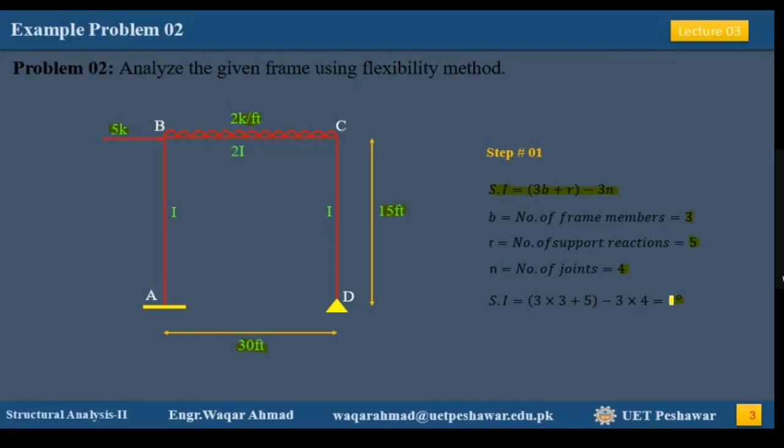Now, what we do in step number 2 is that we select the redundants and release them to obtain the basic determinate structure. The 2 redundants can be selected from support A or support D. I have selected them at support D, so I will release the reactions at this point.

When I release this support, I will then show my redundant actions. This is my first redundant action pointing upward, and this is my second redundant action pointing in the rightward direction horizontally. Now, what are the values of this AR1 and AR2?

Both are unknown, and we will be using the flexibility method to find the values of AR1 and AR2. Once these values are known, the whole structure can then be analyzed using the available equilibrium equations, because these are the only 2 unknowns which cannot be solved using the available equilibrium equations. So this is the redundant action matrix.

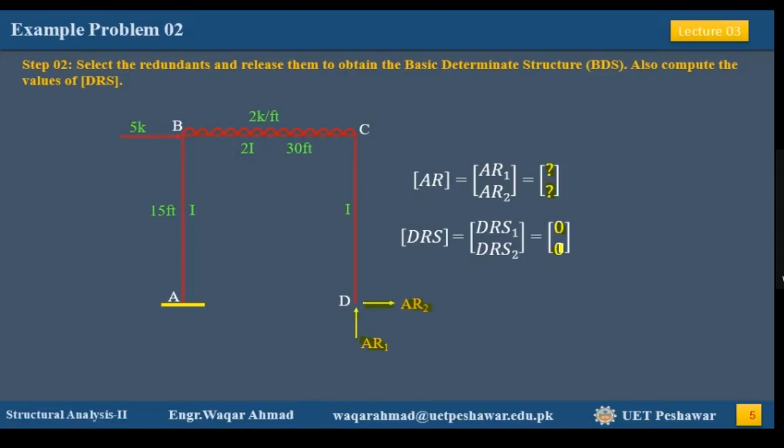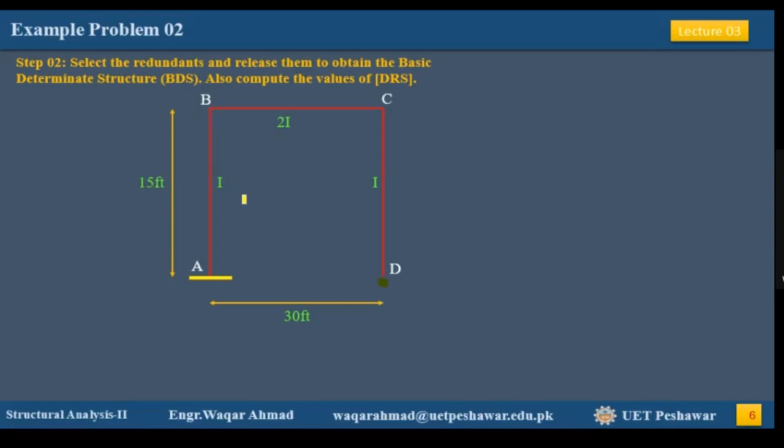So now we will obtain our basic determinate structure by removing the applied external loads and also by releasing the joint at point D. So this is now our basic determinate structure, BDS, which we will be analyzing now in step number 3. In step number 3, we will be analyzing the BDS when acted upon by the external loads. This is the first sub-part of step 3.

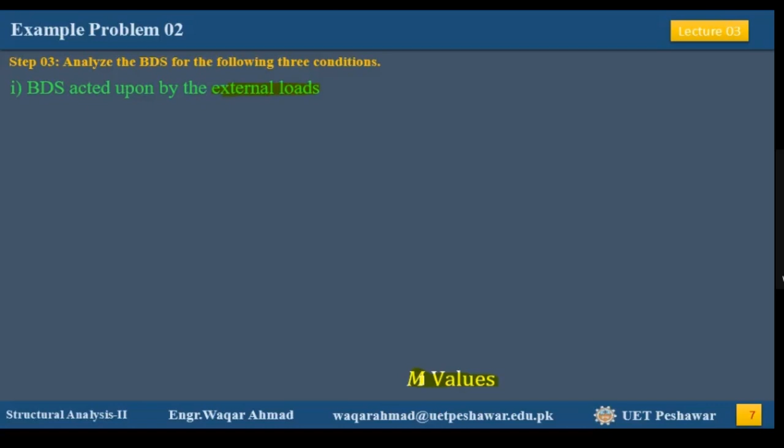And from this step we will obtain the capital M values. Now we know what the capital M values are: the capital M values correspond to the bending moment equations for each member due to the externally applied load.

So now let's start with member number 3. If you look at this member, we don't have any external load applied on it, so the axial force, the shear force, and the bending moment at point C as well as at point D will be 0 because there is no external load acting on this member. Now, if you write the bending moment equation for this section A, for this cross section, there is no load acting and no force which causes moment about this section, so the moment equation will be 0.

Now in the same way, if you look at the next member, we have an external load applied here: this is the 2 kip per foot uniformly distributed load. This load will cause shear as well as moment, and both the shear and moment will be resisted at B, because now we are carrying our analysis towards this point, and if we take the resistance on this one, that resistance will be transferred over here, and then we know that there is no support.

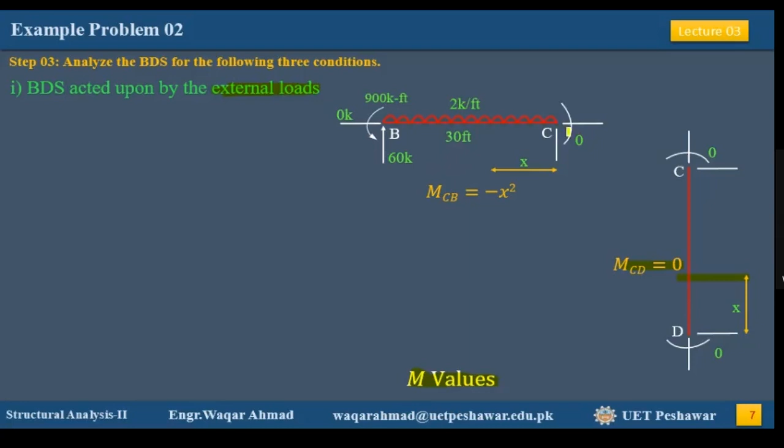Resistances cannot be supported by this joint C. That's why we don't want this joint to resist shear, moment, or axial force. So all the shear and bending moment will be supported at this joint B. Now, similarly, for this member...

Now these moments, shears, and axial forces will be transferred to this member. So the shear force now will be acting as an axial force for this member. And if we solve out, using the equilibrium equations we discussed in detail in problem number 1, we come out with these values of axial force, shear force, and bending moment at this joint A.

Okay, so now if we go back to the bending moment equations, the bending moment equation for this member is equal to 0. For this member, it is equal to negative x squared. This is exactly the same as problem number 1 we solved, right?

So we have taken a section at this distance x from C, the origin. And at this section we want to find the moment equation. The moment will be coming from this 2 kip per foot uniformly distributed load. So if you multiply this 2 kip per foot with x, and then again multiply by x over 2, this will give you negative x squared. The negative sign is because of our sign convention we already discussed.

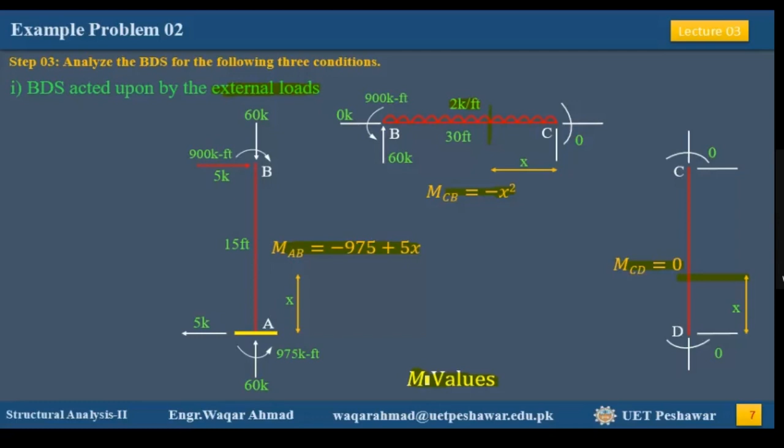Now in the second substep of number 3, we are looking for the M1 values, small m1 values. Where will they come from? They will come from the BDS when acted upon by a unit load, and that unit load should be acting corresponding to redundant location number 1. So what was redundant location number 1? It was this upward unknown reaction.

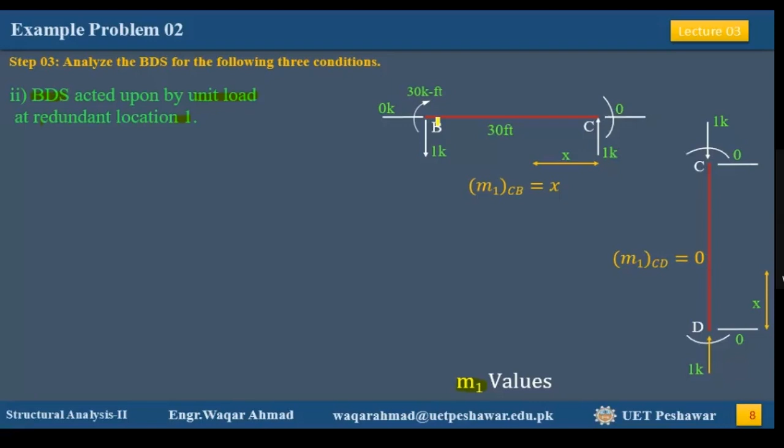So now if you apply a 1 kip load here, this load will be resisted at this point, and accordingly transferred at this point, and then resisted here, and it will also cause a moment which will be resisted at B. Similarly, this 1 kip and this 30 kip-foot moment will be transferred to this member, and finally resisted at this joint A.

Now if you look here, there is no other force which causes moment. The only moment we have here is the one which we transferred from this member CB. So these are the bending moment equations: this one is for this member, this one is for this member, and this is for this member.

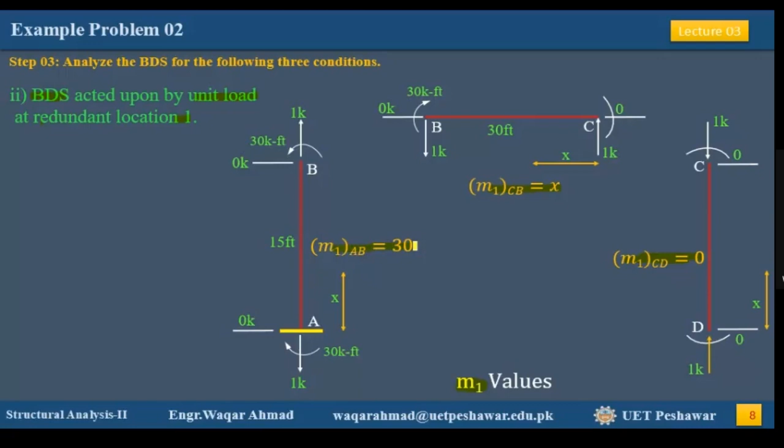So now, if you look at the next step, we will have to analyze this BDS for a unit load which acts corresponding to redundant location number 2. So what was our redundant location number 2? It was this horizontally unknown force.

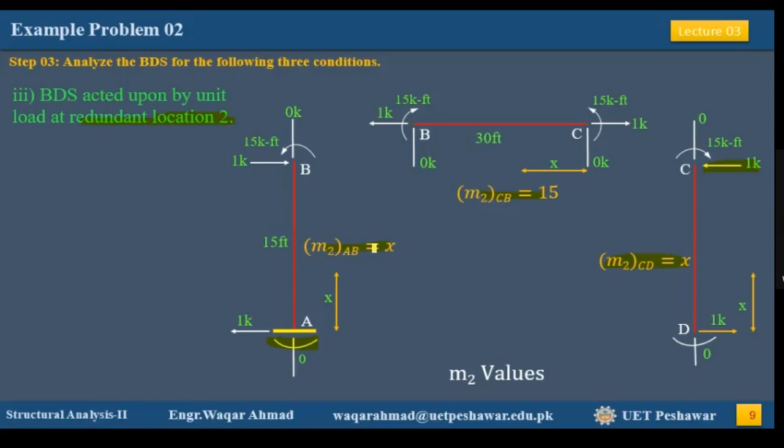Okay, so if you look at the bending moment equations, this is for this member and this is for this member. Now we know how these bending moment equations are obtained — we discussed them in detail in problem number 1. So now, in the next step, we have to arrange all these bending moment equations in the form of a table.

Now why do we do this? We do this because we want our work to be efficient. By efficient, we mean there should be less chance of error, and we should go with our work a little faster, okay.

So this is the origin for AB. These values correspond to member AB, these correspond to member BC, and these correspond to member CD. So the origin, we know these are the points taken for writing the bending moment equations, and these are the limits from 0 to the length of the member. Moment of inertia: for the first member it is I, for the second member it is 2 times I, and for the third member it is I.

Now these are the equations we obtained from step 3A or 3.1, when external load was applied. So this was the bending moment equation for member number 1, this was for member number 2, and this was for member number 3. Similarly, the M1 values and M2 values are given here, and they are coming from step 3B and 3C respectively.

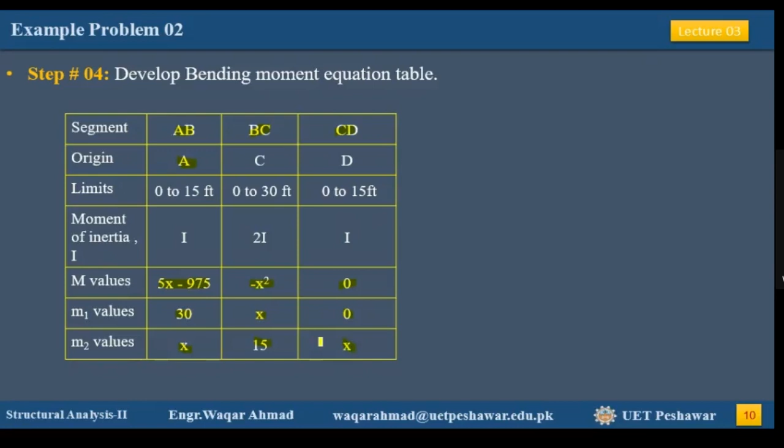Okay, now we will be utilizing these values in the next step for finding the DRL matrix. The DRL matrix corresponds to the displacement at a redundant location due to external load acting on the BDS, the basic determinate structure, okay?

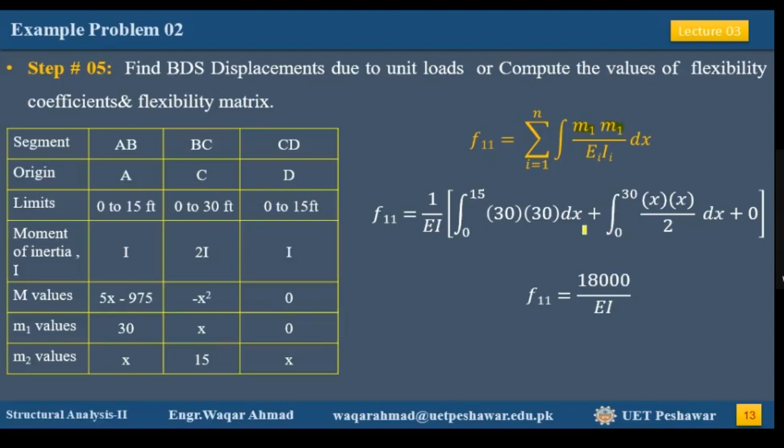This is the equation. So we will be using both times the small m1 from this table, and then we sum them to get this value. Similarly, we obtain our F22, and then we can also calculate F12, which will be the same as F21.

So again, F12 here corresponds to finding the displacement at redundant location 1, with the unit load applied at redundant location number 2. So we will now use both M1 and M2. If you solve this, you obtain this value for F12 and F21.

Why are F12 and F21 the same? Because whether you write M1 first or M2 first, it does not affect the final output, right? The final output will be the same as given here, 6750 divided by EI. So now this is the flexibility coefficient matrix.

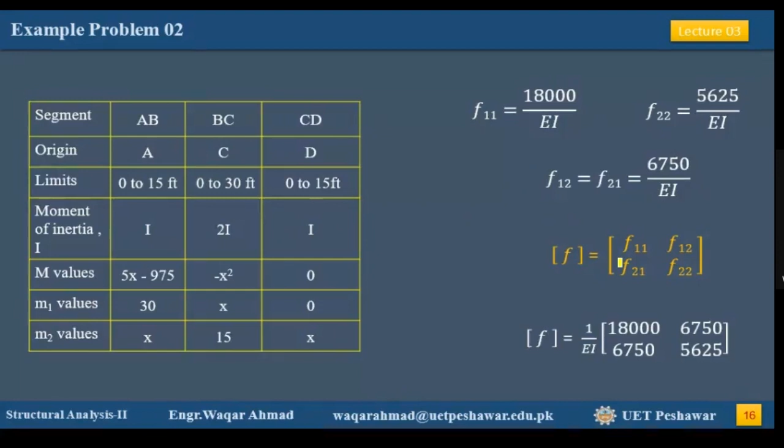So this was about finding the values of the redundant actions. I told you earlier that once the values of the redundant actions are known, we can solve the remaining structure using the equilibrium equations. But if you are using this flexibility method, there is a proper mechanism for this, and you have to use it.

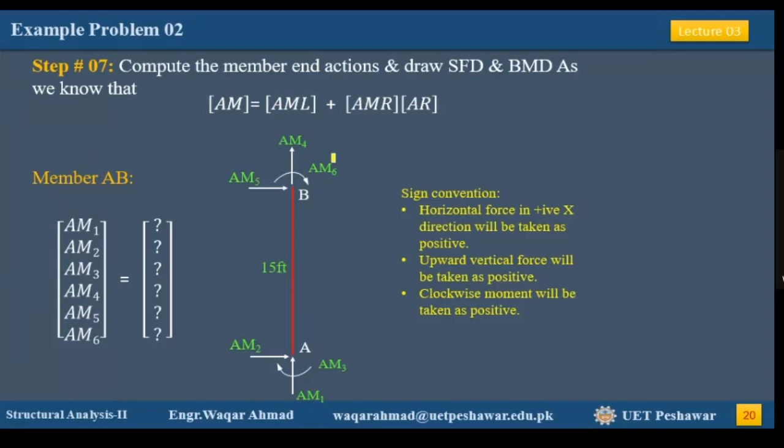Now we can apply this equation in order to find the member end actions for each member. What is this AM matrix? This AM matrix is the member end actions. This AM1 acting upward, this is our AM1, we have chosen this to be our AM1 for this member. This shear is AM2, this moment is AM3, and similarly AM4, AM5, and AM6. So now we need to apply this equation for this member in order to find out these values of AM1 to AM6, and what are the different matrices involved.

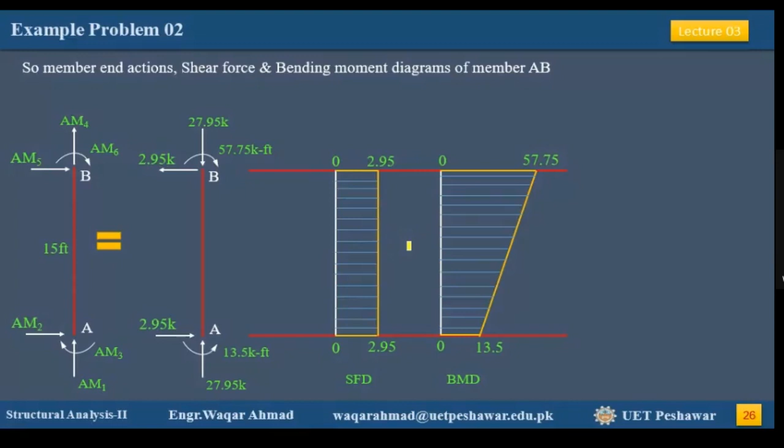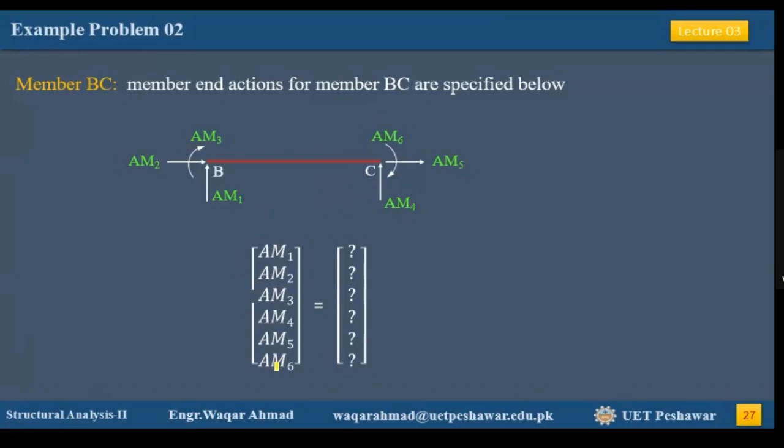Similarly, for the next member, we need to find the values of the AM matrix, obtained by writing the AML matrix first, which corresponds to the member end actions when external load was applied on our structure. Similarly, we write our AMR matrix. The first column comes from step number 3, part A, when we applied a unit load and analyzed the whole structure for that unit load corresponding to redundant location number 1. This column comes from step number 3, part B, when we applied a unit load corresponding to redundant location number 2, and solved the whole structure for that load. So we got these member end actions, and if we write them here, we get this AMR matrix.

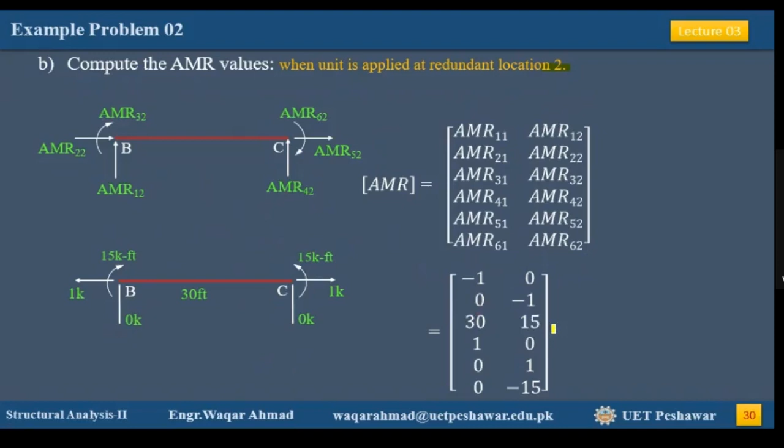Similarly, if we plug those matrices into the equation, we get our values of the AM matrix. This is AM1 for the second member, this is AM2 for the second member, similarly 3, 4, 5, and 6. Again, the negative sign simply shows that we need to reverse the direction of our member end action. Now the shear force and bending moment diagram here for the next member.

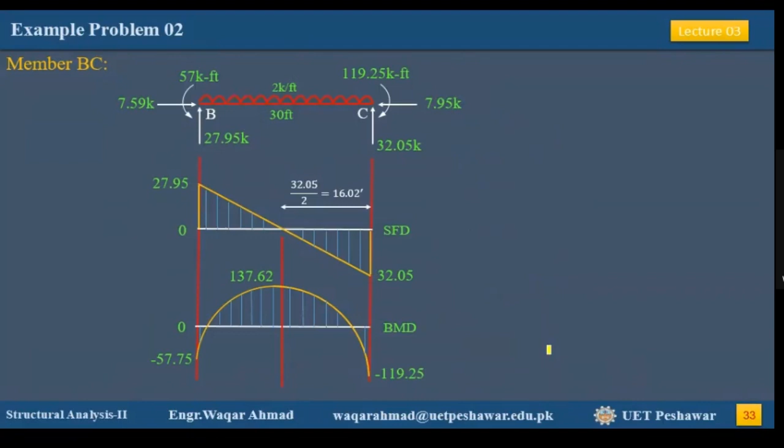Now we come to member number 3, and in the same way we find the AML matrix, the AMR matrix. After finding the AMR matrix, we need to plug those values of AML matrix, AMR matrix, and AR matrix here, so that we can obtain the values of our AM1 to AM6 for member number 3. So these are the values of the member end actions for member number 3. So again, we draw the shear force and bending moment diagram now for member number 3.

So the combined shear force and bending moment diagram for the whole structure now, you can see it. This is member number 1, this is member number 2, this is member number 3, and in the same way this is the bending moment diagram for each member. So this was about the example problem number 2. We did it a little faster because we already solved it in great detail in problem number 1.

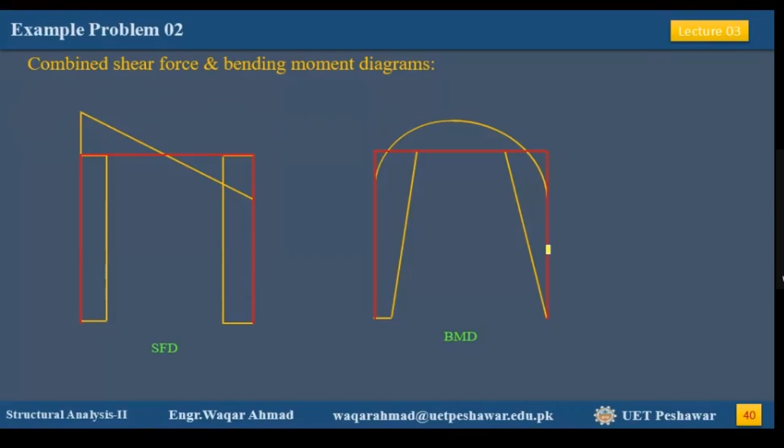Now let's move to another problem, and this time we will be taking exactly the same problem number 2, but now we will be making some changes. What are those changes? We are now applying some translation at this joint D.

So joint D is translating by 0.5 inches. You can see this joint is translating by 0.5 inches in this direction. Also, it settles down by an amount of 0.75 inches. You can see that this support is also settling by 0.75 inches, as given here. Now how do we solve this structure? This is exactly problem number 2 as we discussed, but now we have to incorporate this settlement and this translation into our calculations. Let's see how we do this.

Step number 1 is exactly the same. We have to find the static indeterminacy, and it comes out to be 2 degrees. This settlement, it will not affect the static indeterminacy for sure. Now we are also given the value of the modulus of elasticity and the moment of inertia for this structure. If we multiply them, we come up with this value. So whenever we use the EI value, we now have to put the value of EI equal to 125,000 kip-feet squared.

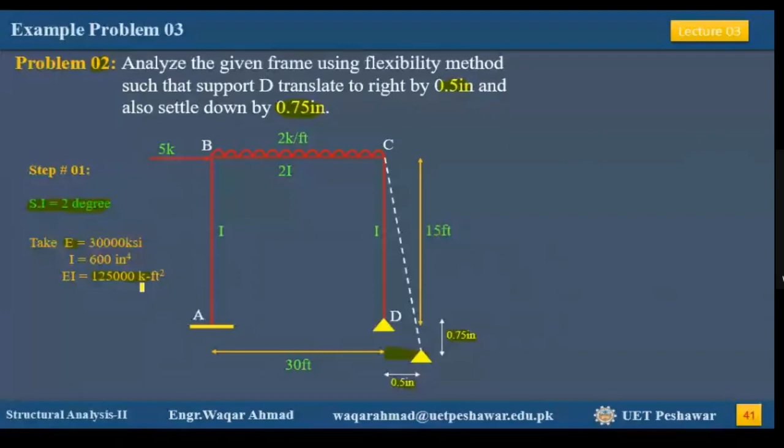Step number 2, we release our joint, our support at joint D, and we write our redundant actions corresponding to the constraints we have released. This is AR1, this is AR2, and of course we have to find the values of AR1 and AR2 through this flexibility method.

Now important to look at here is what are the values of DRS1 and DRS2. DRS1 corresponds to redundant action number 1. We have chosen our redundant action to be acting upward, and there is a support settlement corresponding to this redundant action, but that settlement is downward. This support is coming downward. It corresponds to this redundant action, but has an opposite direction. So corresponding to AR1, we will write our DRS1 value, but we will put a negative sign with this.

Now if we had chosen our AR1 value to be acting downward, then there would have been no need of writing this negative sign, because the settlement would have been in the same direction as our chosen direction for redundant action number 1. So in this actual case, as we have chosen our redundant action to be acting upward, but the settlement is opposite to this and is downward, we need to write the negative sign with this value of settlement.

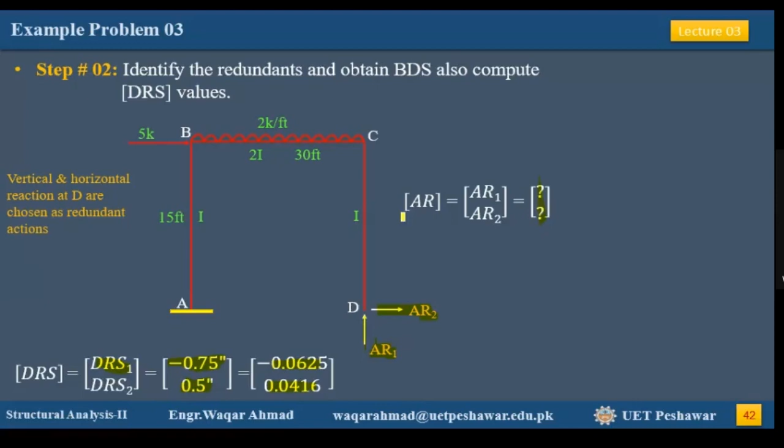Now we have converted it into feet because we are using feet as the unit for length most of the time in this problem, so we need to convert this to feet for unit consistency. So from this step we have obtained our DRS matrix. Now we need to apply the other step.

In step number 3, we have to again analyze the structure for the external load applied. So we have analyzed here, and the procedure is exactly the same as we discussed in problems 1 and 2. These are the member end actions we have obtained, and these are the bending moment equations for members 1, 2, and 3.

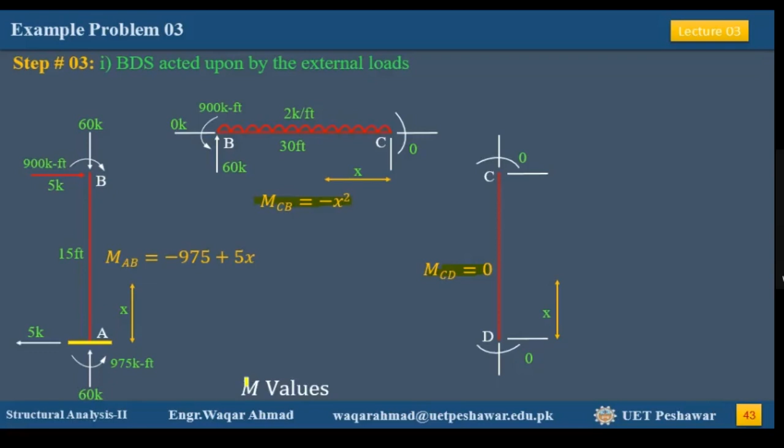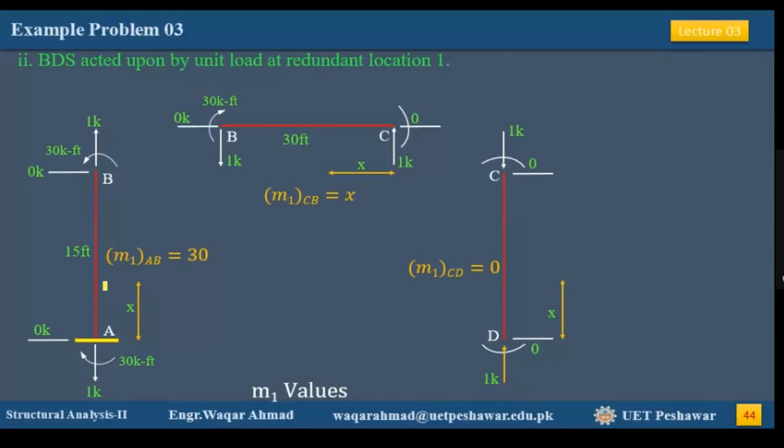So these bending moment equation values will be the M values, capital M values. Similarly, we write the m1 values corresponding to location number 1. We have applied a unit load of 1 kip and solved all these members. Similarly, in the next step, we have applied a unit load corresponding to location number 2 and again solved the members, and we have also written these bending moment equations for each member.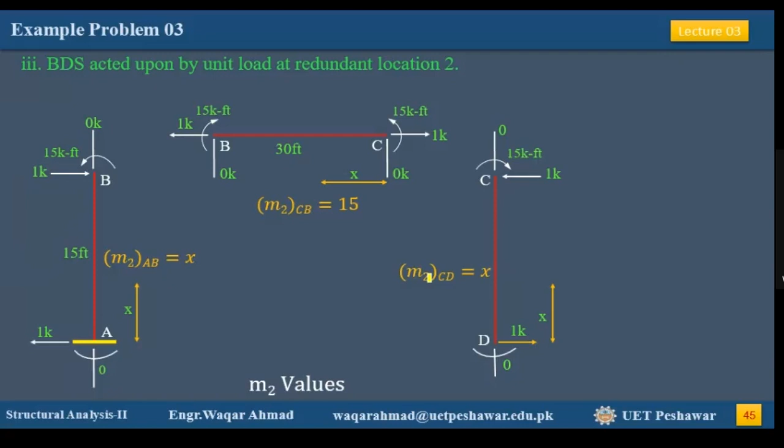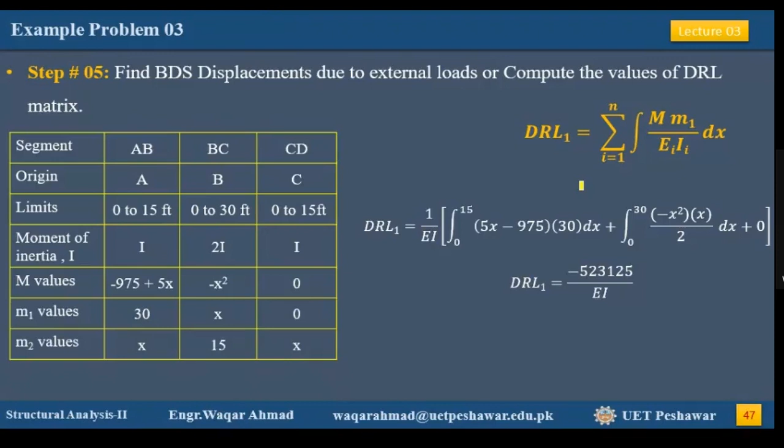Step number 4, again we now develop this table, and in step number 5 we need to find the DRL1 value, which will be the displacement at redundant location number 1 due to external load applied. So these capital M and small m1 values are now being picked from this table for members 1, 2, and 3. Also for members 1, 2, and 3, these are the small m1 values.

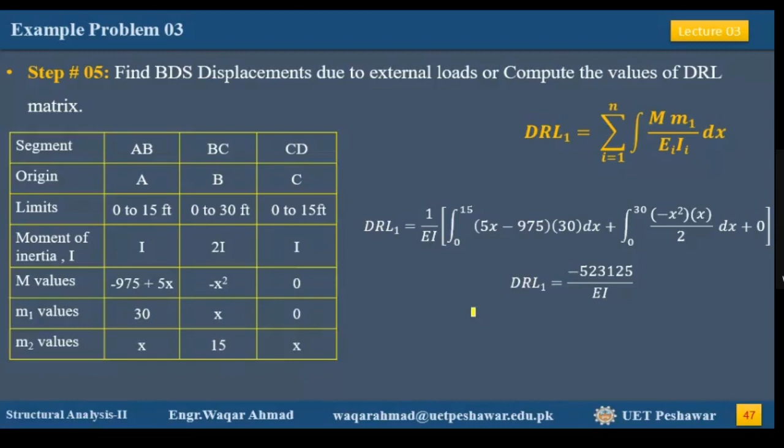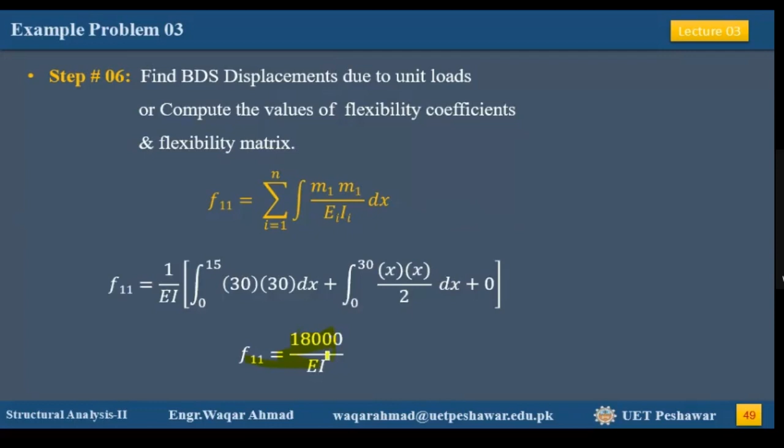Now similarly we find out this flexibility coefficient matrix, which is the displacement at a redundant location due to a unit load applied at any of the redundant locations. So this is F11, which is the displacement at 1 due to unit load applied at 1. We find this value exactly as we did earlier. So we can find F11, F22, and also F12 here.

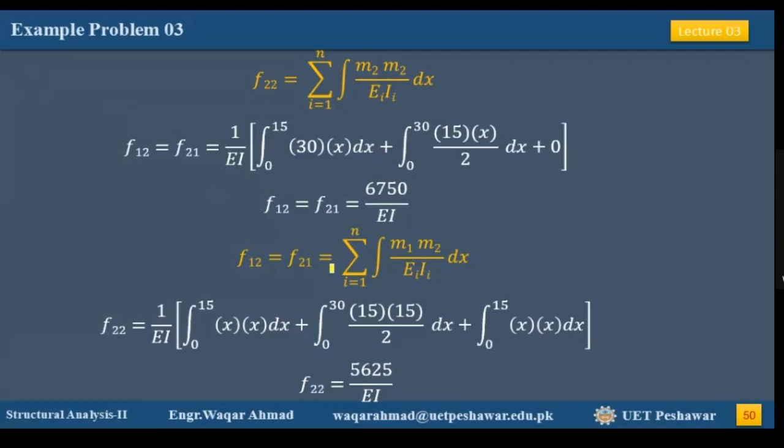So if we find out this final flexibility coefficient matrix, we need to incorporate these values of EI. If you divide each element of this matrix by EI, you come up with this value for your first element, and similarly these values for the other elements of the matrix. Now this is your final flexibility coefficient matrix.

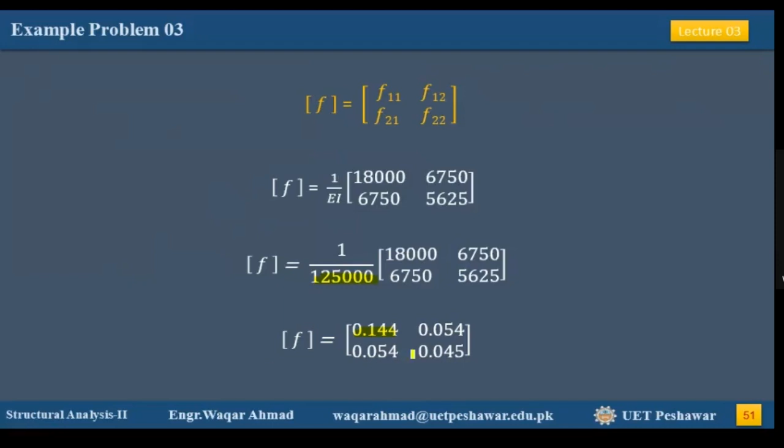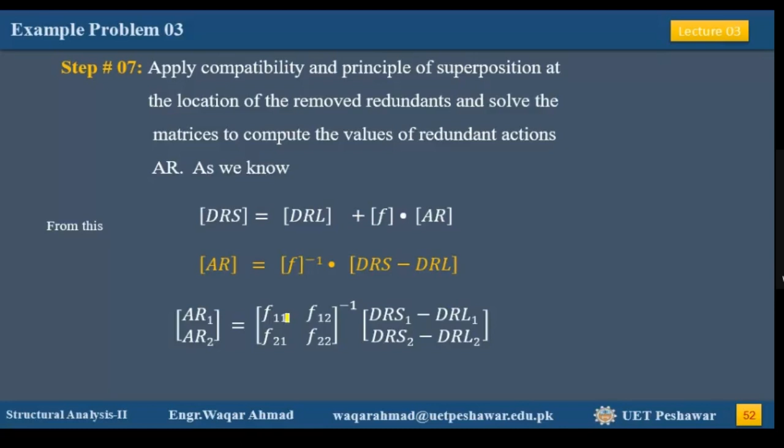Now we need to plug in these matrices in this equation. We have our flexibility matrix, our DRS1 and DRS2 values, and our DRL1, DRL2 values. So now if you plug them in, you have to take care of the sign. We have a negative sign with this, and also a negative sign in the equation. So you need to take care of every sign here.

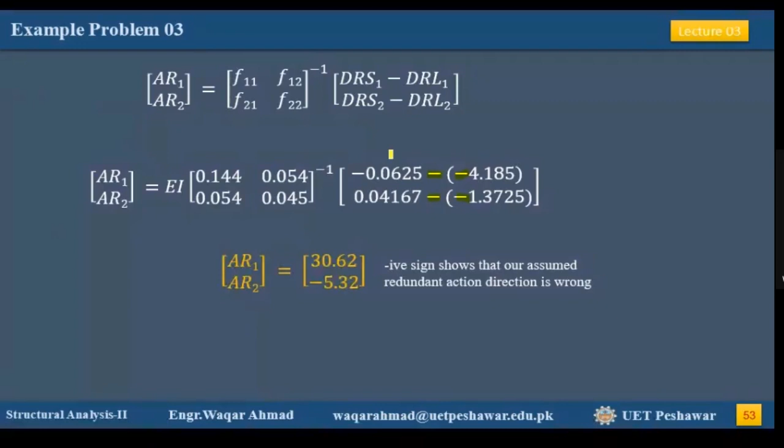So now DRS1, we know it is coming from that step where we calculated the support settlement and that translation, and we wrote that corresponding to this redundant location 1 and 2. So this is the DRS matrix, and this is the DRL matrix.

When you apply these matrices, this inverse, and then multiply them, you get AR1 equal to 30.62 and AR2 equal to negative 5.32. This EI will not cancel out because we have consumed the value of EI in this DRL matrix, also in the flexibility matrix.

I think this EI should be cancelled. There is no need now to write this EI because it is already consumed. This was by mistake, I will remove this now.

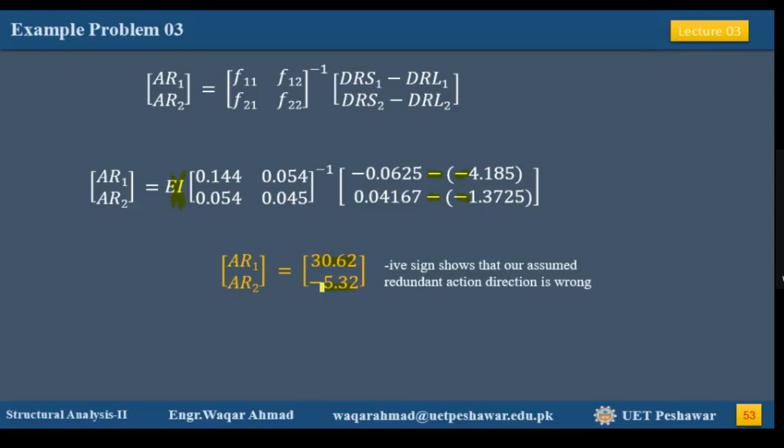So now AR1 is 30.62, AR2 is negative 5.32. Again, the negative sign is showing that we need to reverse the direction of our redundant action number 2. So we reverse the direction of that.

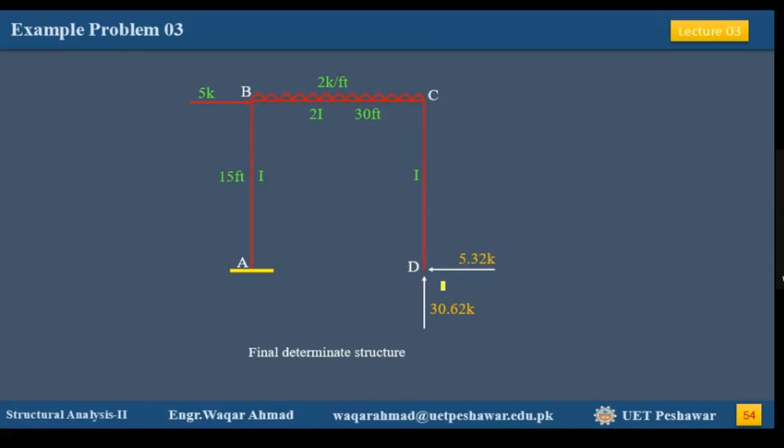So we need to find out the member end actions, and the procedure is exactly the same as we discussed in problem number 1 and problem number 2. So we need to find the AML matrix. The AML matrix is coming from when we applied the external load on the structure and we obtained the member end actions.

That was in step number 3A. Similarly, you find the AMR matrix. The AMR matrix is coming from, this first column is from step number 3B, and the second column is from step number 3C. In step 3B, we applied a unit load at redundant location number 1 and solved the structure. Similarly, in step 3C, we applied a unit load at redundant location number 2 and solved the structure.

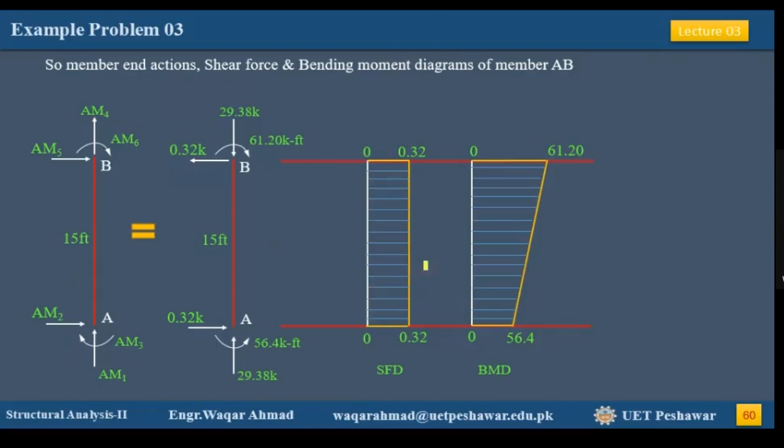Once we obtain these matrices, we need to plug in the values here, so that we can get our final values of AM1, AM2, 3, 4, 5, and AM6 for member number 1. Similarly, you draw the shear force and bending moment diagram for this member.

Then you go to the next member and solve it for the AML, solve it for the AMR, and then solve for the AM by plugging in the values of AML, AMR, and AR here. So we get these values of the member end actions for member number 2.

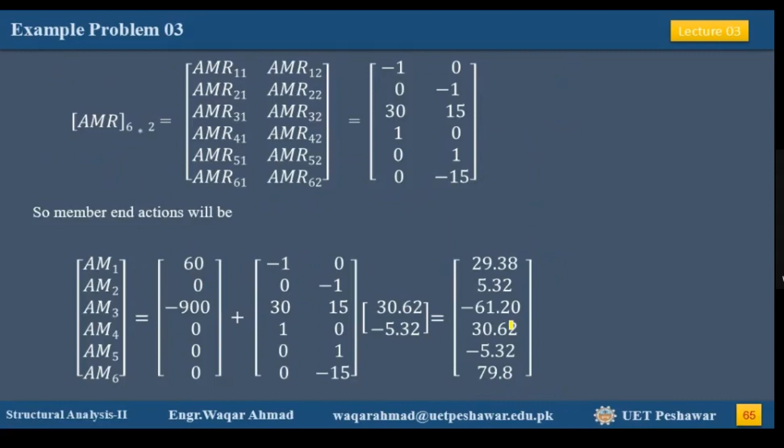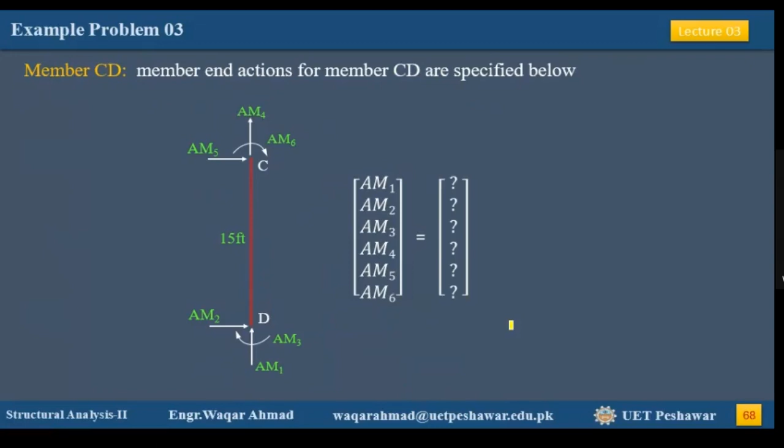So you do it again, and now you draw the shear force and bending moment diagram here, and then you go to find the member end actions for member number 3. So again, we need to find out the values of the AML matrix here.

They are 0. Why are they 0? Because due to external load, there was no shear, no axial, no bending moment, because there was no external load acting on this member. So that's why the AML matrix is 0 here.

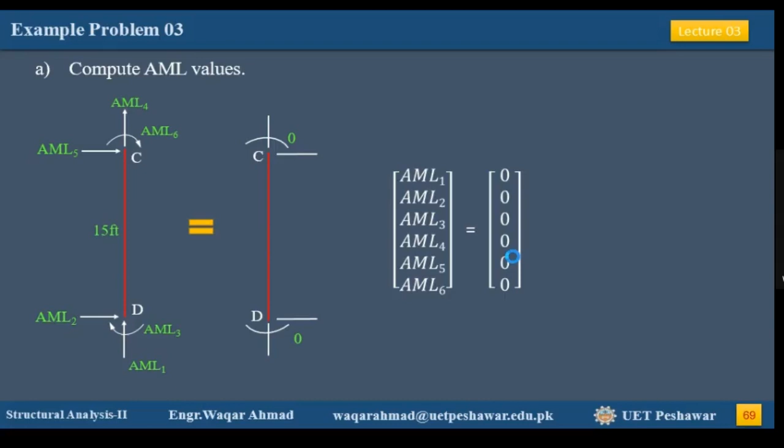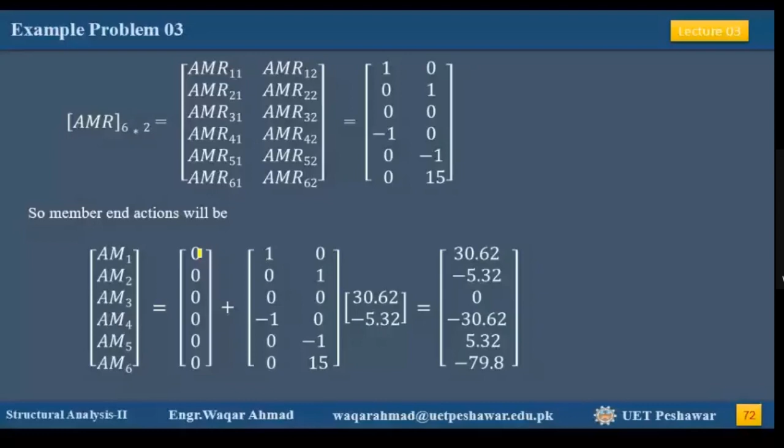So now you need to find out the values of the AMR matrix, and when you plug in these values, AML, AMR, and AR, you get these values for the member end actions for member number 3.

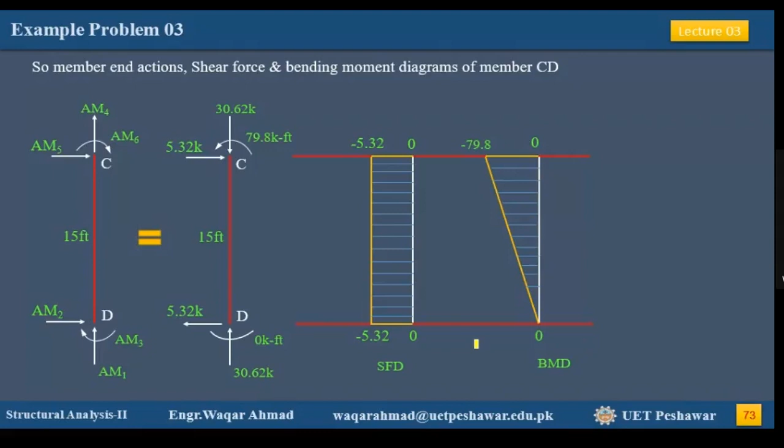Now we will be starting our lecture number 4, which is about the analysis of trusses, and the trusses are statically indeterminate. So now let's shift to lecture number 4.